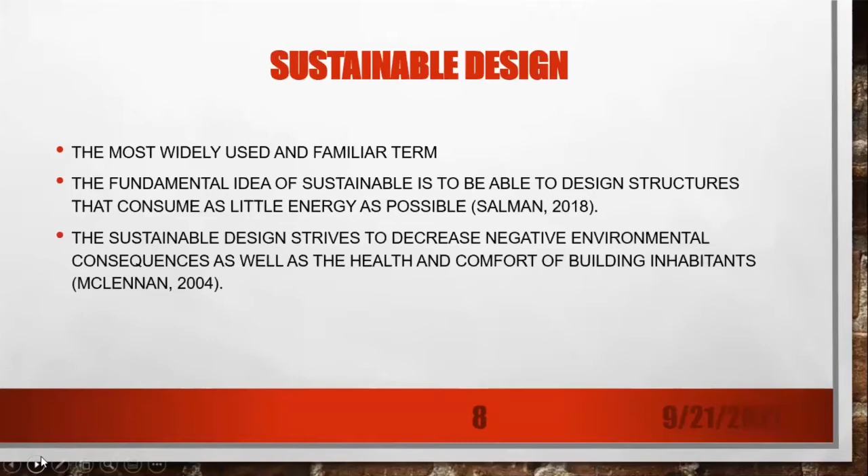Sustainable design is the most widely used and known term among today's environmentally friendly approaches. The basic idea of sustainability is to consume as little energy as possible. At the center of this approach, like the other approaches, is the human being.

Biophilic design: the main purpose of biophilic design is to create suitable spaces and eliminate the negative psychological consequences of the built environment on humans. This approach is entirely people-oriented, like the other approaches.

Human-centered design: the common feature of all these approaches is that they put humans at their center, as well as reducing damage to the environment. This is never a bad thing, but we are not alone in this world.

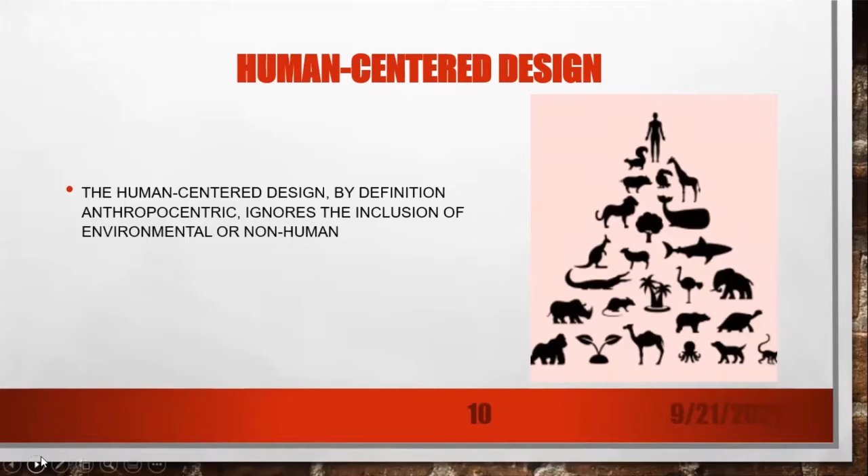How many designers consider coral reefs when designing? I am not sure, but maybe a few. Because rising global sea levels or species loss do not affect the success of our business and our buildings. Because we are designing for humans, not non-human creatures.

We know the problem, and we also know the solution. All approaches such as green, ecological, sustainable, biophilic, and so on refer to technical solutions that are essentially unsustainable systems. They may slow things down, but they cannot lead us to a genuinely healthy, green world. They can increase material and energy efficiency, but they cannot significantly reorganize development based on resources.

Now, it's time to talk about nature-centered design. Nature has the potential to renew itself unless humans intervene, as I mentioned earlier. When all human design, buildings and services, resource extraction, agriculture, and industrial processes are evaluated, an understanding that brings together processes by designing infrastructure that imitates and replaces how the natural world works, while putting all other living creatures at the center, must be developed.

Take an example. Before the construction, the location was forest, wilderness, agricultural land, and marsh, each with its own metabolic fluxes, which converted solar power, absorbed carbon dioxide, produced oxygen, and provided habitats to a multitude of tiny animals. The act of construction modifies all these cycles.

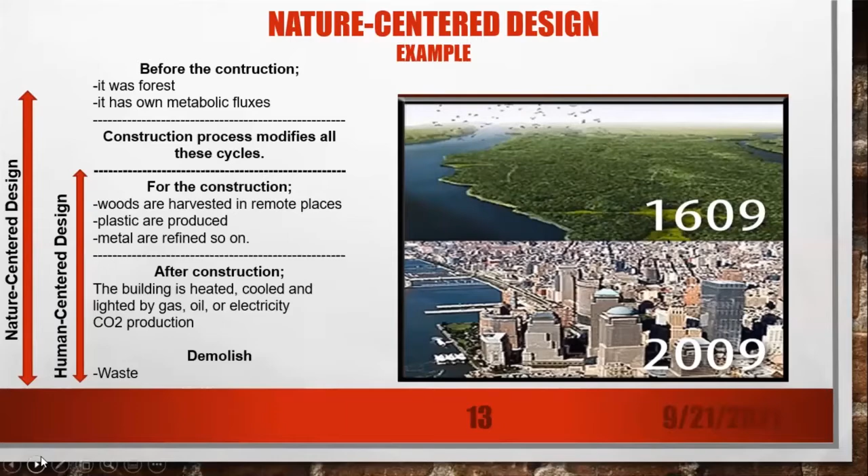To sum up, if we believe that humans are the only remarkable species on the planet, we will continue to harm nature without considering the processes described. The future of humanity is dependent on nature, moving away from a completely human-centered perspective of the world. Building with nature will be a critical tool in developing a crucial new architecture for empathetic design. Thank you for your attention.

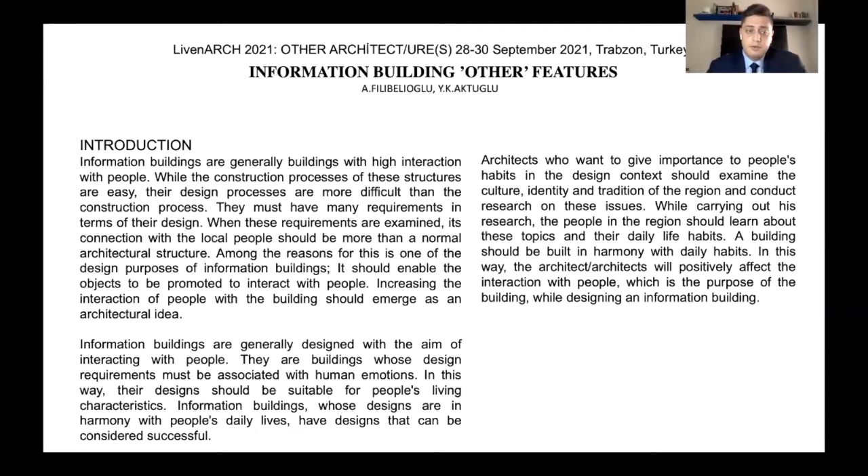For culture, since ancient civilization, meeting the shelter needs of people has been in line with the culture, identity, and tradition of the people. Every civilization has its own characteristics. One of the important titles for information buildings is the title of culture.

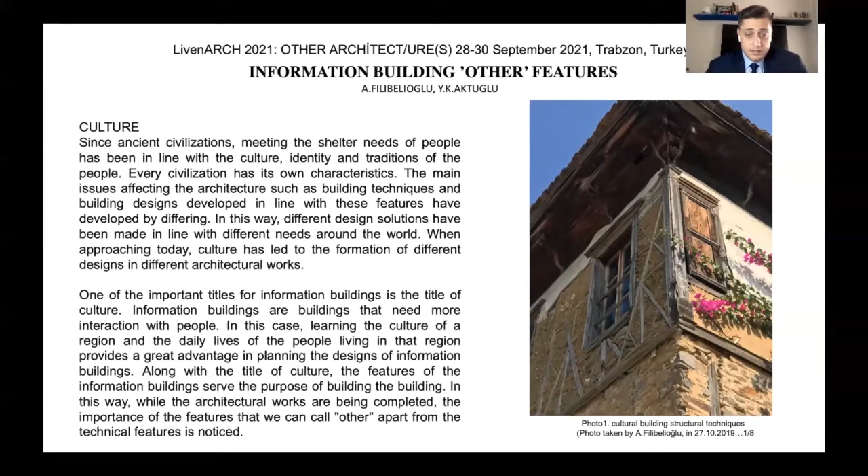Information buildings are buildings that need more interaction with the people. In this case, learning the culture of the region and the daily lives of the people living in that region provides a great advantage in planning the design of information buildings. In this way, while the architectural works are being completed, the importance of features other than the technical ones is noticed.

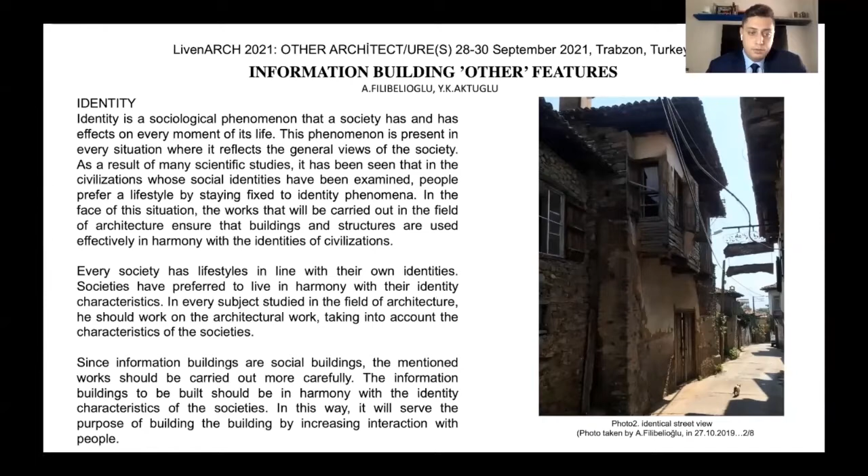Identity is a sociological phenomenon that a society has, and it has an effect on every moment of its life. Every society has a lifestyle with its own identity. Since information buildings are social buildings, the mentioned works should be carried out more carefully. The information buildings to be built should be in harmony with the identity characteristics of the society. In this way, it will serve the purpose of the building by increasing interaction with the people.

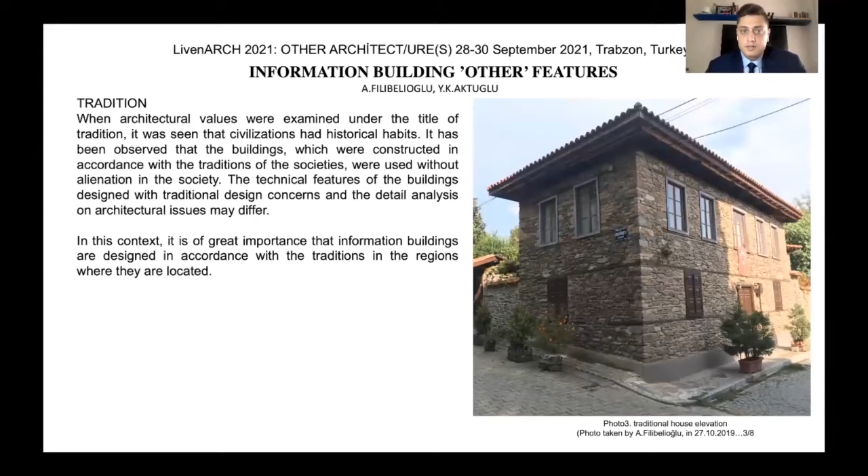When the architectural values were examined under the title of tradition, it was seen that the civilization had historical habits. For example, Infobox is an important information building.

The building was located in the city center of Berlin in 1995. After the fall of the Berlin Wall, the building was used as an information office, where the control of the redesign and construction of the city and region was carried out.

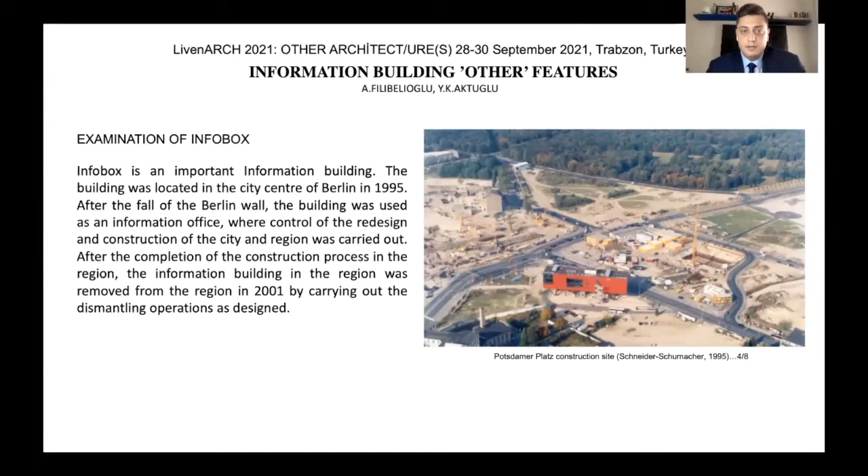For the architectural detail, there are technical details of the Infobox building. The building has 7 meters height from ground level, and each floor has 5 meters between them, making a total floor height of 15 meters. On the ground level, they use circular steel columns with concrete fill, with diameters of 40 centimeters. On the other parts of the building, they use I-beams. For the facade, they clad with steel panels, used at 2.5 meters by 0.5 meters.

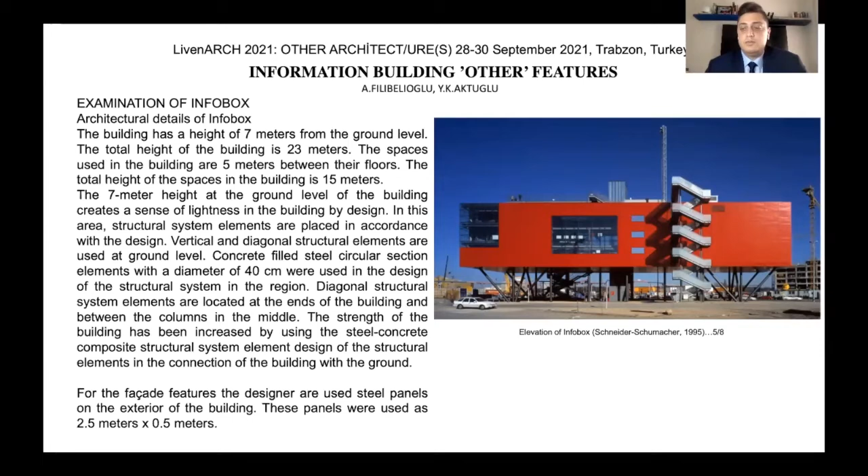For the culture, recreating the city center culture is to ensure that the people following the construction process are included in the culture.

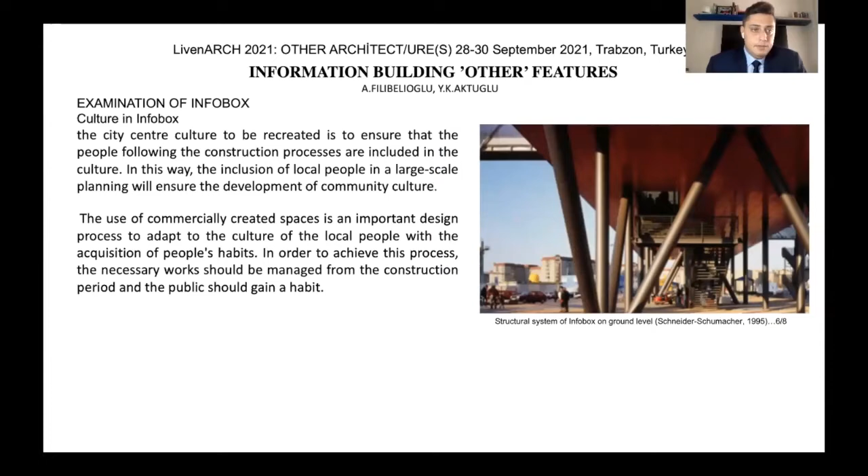In this way, inclusion of the local people in a large-scale planning will ensure the development of the community culture. The building was built with the aim of controlling construction site operation, and in addition, the local people were planning to gain habit of the region. When the Infobox information building is examined under the title of identity, it has the interaction between the city center created in the region and the local people, and has provided development of the social identity of the local people.

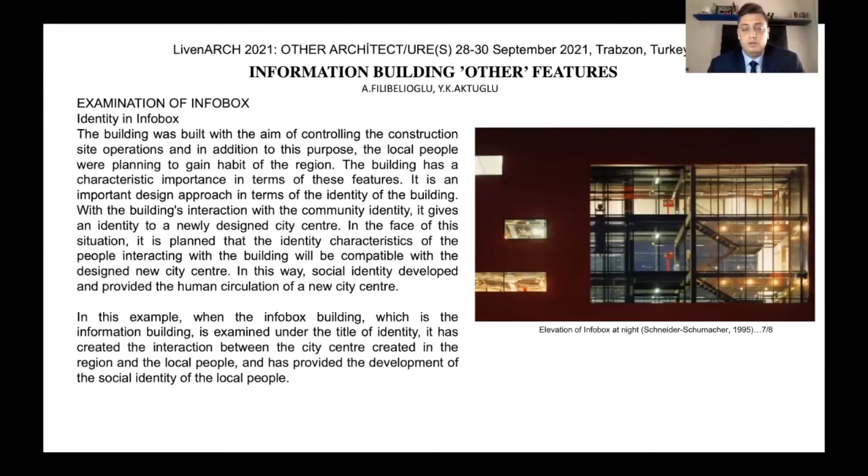The Infobox information building, examined under the theme of tradition, was examined as an element that provides formation in a new order. Examined in the face of the situation, the building design was built with the structural system in mind. After its construction, the building was dismantled and removed from its location.

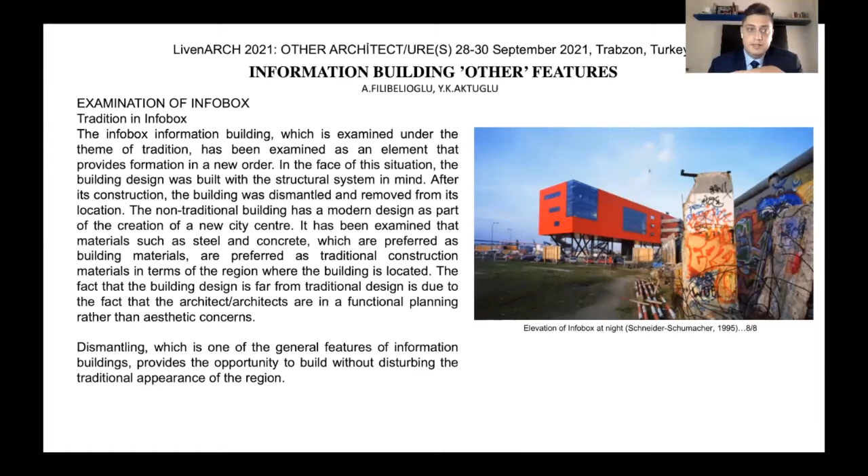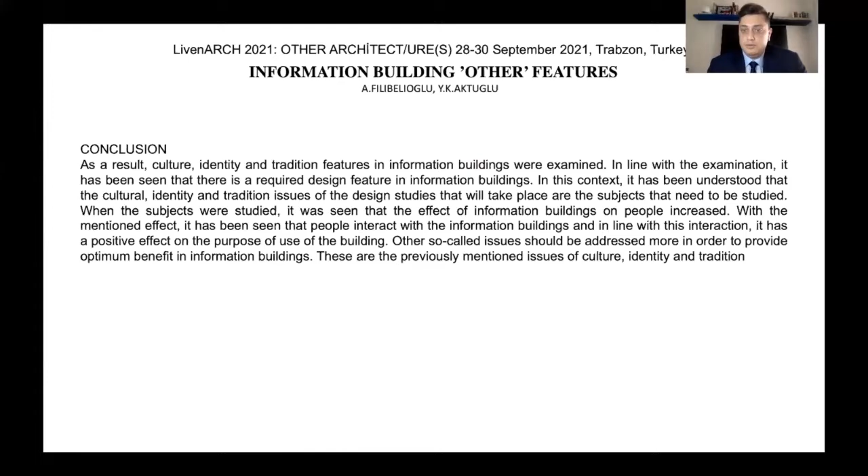As a result, culture, identity, and tradition features of the information buildings were examined. In line with the examination, it has been seen that there are required design features in the information buildings. With the mentioned effects, it has been seen that people interact with the information buildings, and in line with this interaction, it has a positive effect on the purpose of use of the building. Other issues should be addressed more in order to provide optimum benefit in information buildings. These are the previously mentioned issues: culture, identity, and tradition.

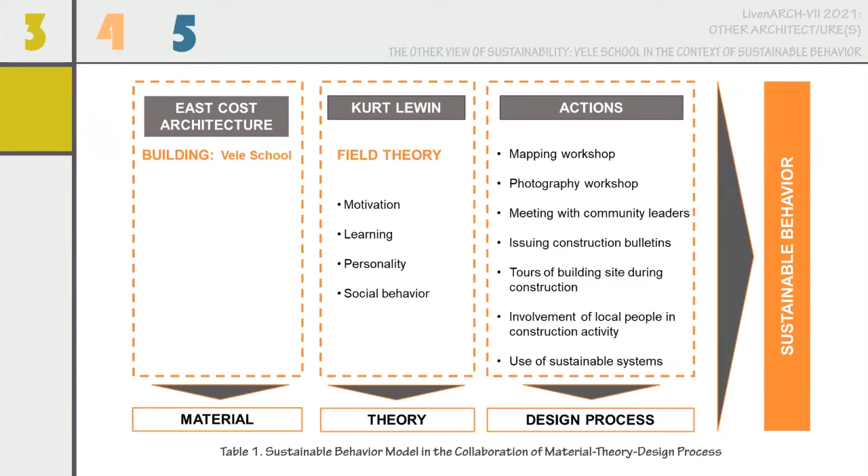When Vele School's design process is examined in the context of the concept of motivation, the map workshop, photography workshop, meeting with community leaders, issuing construction bulletins, site tour during construction, local people's involvement in construction activities, and the use of sustainable systems are matched to the concept of motivation. These actions are all actions that motivate the user and local people toward sustainable behavior.

In the map workshop, concepts related to the map of the area were introduced to students. The architects, who turned the map workshop into a fun activity, interacted with the students.

The actions increase the motivation of both students and architects. Lewin's theory views learning as a relational process in which a student develops new insights or changes old ones. According to the theory, learning is not a mechanical process that connects stimuli and responses within a biological organism. Field psychology explains the development of insight as a change in the cognitive structure of the living space.

When the design process of Vele School is examined in the context of the concept of learning, the map workshop, photography workshop, site tours during construction, and the local people's involvement in construction activity match the concept of learning. In the map workshop, architects learned about the physical, cultural, and social aspects of the place, whereas the students and local people learned by experiencing the building and construction process during site tours and by taking part in construction activities.

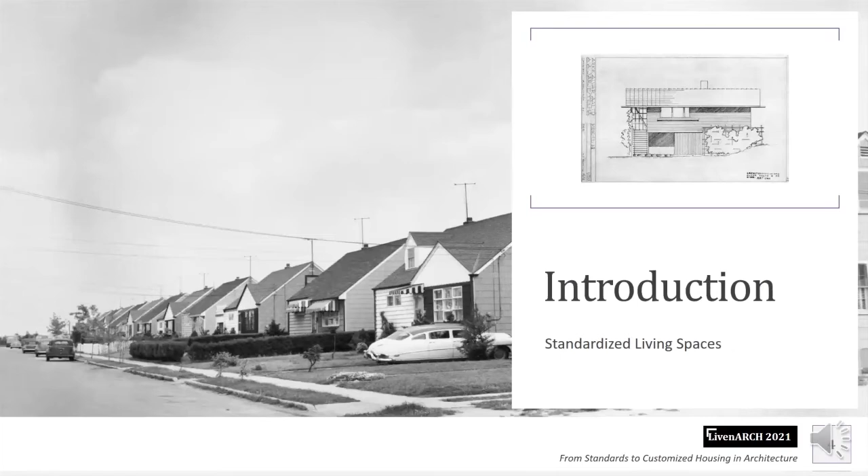Standardization of living spaces: the use of mass production techniques in construction started with closing the housing deficit in a short time and cheaply after the Second World War. These buildings, designed especially for workers and their families in industrial centers, attracted the attention of modernist architects over time. It was a dream of architects of the period to produce housing parts as Ford produces car parts on the mass production line.

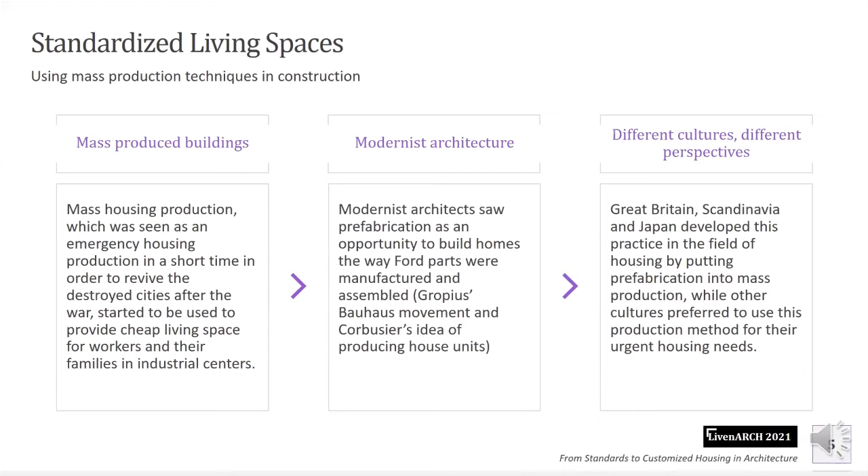Especially England, Scandinavian countries, and Japan have more specific studies compared to other cultures. The biggest driving force in mass production in England was the colonization movement, and England became a pioneer with the invention of corrugated iron, which can be considered the building block of prefabricated systems. In order to eliminate the post-war housing deficit, the government of the period started using factories for the production of housing parts.

The design of Scandinavian mass-produced residential pieces began in the mid-19th century and grew rapidly. The houses of Scandinavian countries, which paid most of their post-war debts with prefabricated housing parts, still consist of a considerable amount of mass-produced housing parts.

In Japan, in the same period, the mass production technique was tried to be used effectively in the metabolism movement, and the pioneers of the movement were supported by the government of the period. By supporting the social and cultural infrastructure of the Japanese people, the technology of the period was used efficiently, and mass production was interpreted differently from the West.

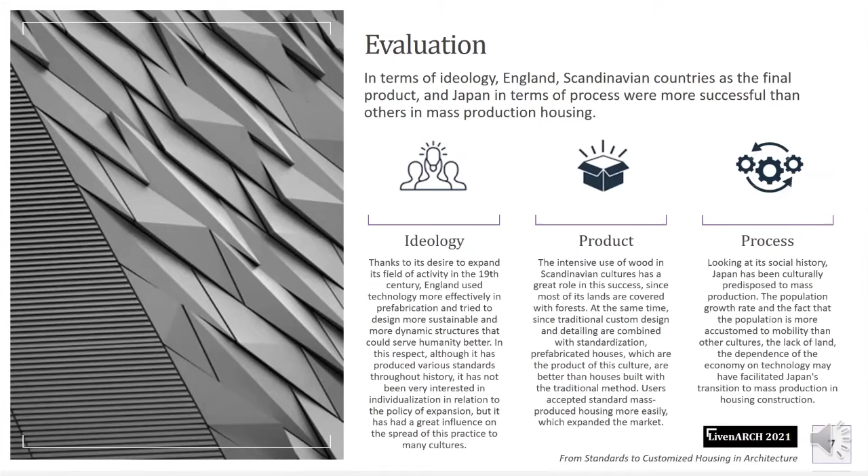Ideologically, England and Scandinavian countries lead in product, while Japan leads in process among mass production houses. England's expansionist principle pushed it to use technology more effectively and country-specific building materials, personalizing through detailing. Scandinavian countries developed the product itself, while Japan accelerated the process by efficiently evaluating the social history and resources of its people.

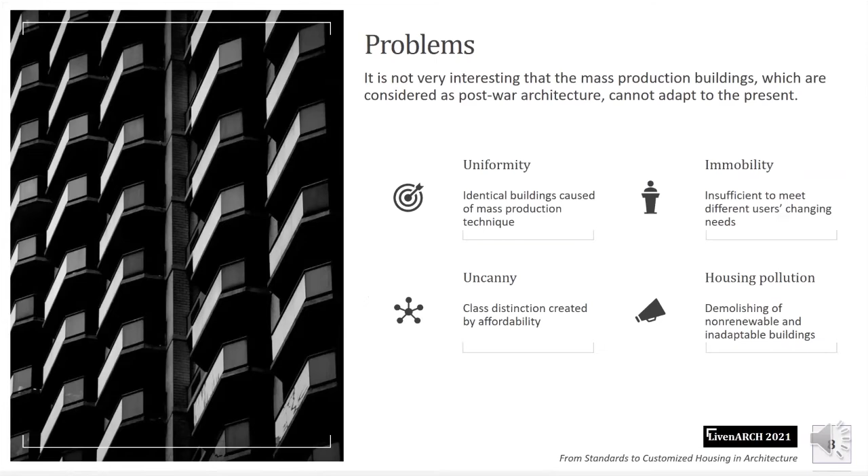Still, since mass production structures were designed considering post-war conditions, they could not adapt to the present day. The main problems include uniformity, inflexibility to develop, the uncanniness created by class difference, and housing pollution caused by the disuse and demolition of useless houses.

At this point, we need to look at customization. Throughout history, people have customized their living spaces according to themselves. The key to flexible space is changeability.

Changeable space definitions, space elements, and location, as well as changing users and their wishes and needs, should be considered. The need for shelter, a basic need, should be economical, sustainable, adaptable to its conditions, and personalized.

This will be possible by changing and adapting construction techniques. As a suggestion, we bring the concept of mass customization, which brings together mass production and customization, to be examined at the housing scale.

The most important point is that users determine the space they will live in, while designers, architects, and engineers take a supporting role, not that of the main creator. Three steps can be identified: identifying, designing, and combining.

First, the user's wants and needs should be identified. The design of life modules requires the active use of information technologies. The key is recognizing that living spaces and usage patterns can change as the user's lifestyle changes.

In the second step, information technologies play an active role, presenting multiple suggestions to the user simultaneously through rapid evaluation and probability calculation. Afterwards, it can be made suitable for the user as soon as possible using mass production techniques during the production phase.

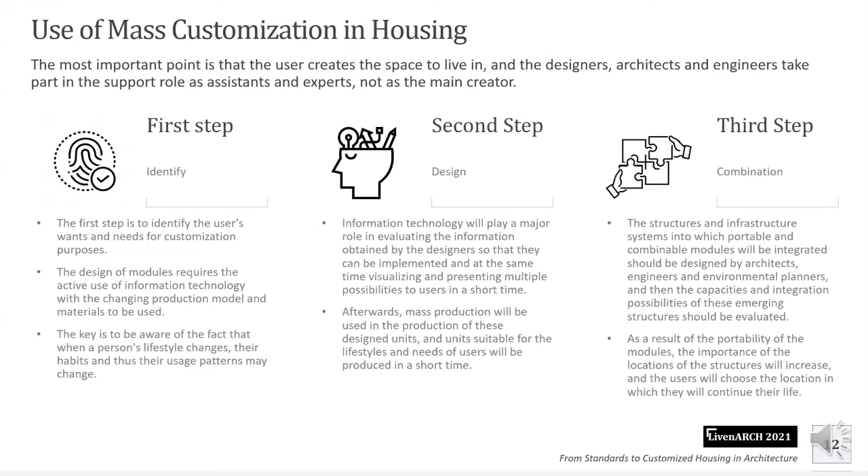Continuous and fixed structures should be designed at the centers of transportation networks so that living spaces can be connected in different ways and benefit from common infrastructure services.

In conclusion, it is necessary to develop housing, a consumer product, and turn it into a product that can meet user needs with less cost and a shorter production process.

To achieve this, it is necessary to overcome the traditional methods and building materials that lead architects to design living spaces rather than the elements that make up living spaces.

Afterwards, mass production, which is used in producing all kinds of products today, should be used more actively in housing production. The ways of using this technology together with customization should be investigated, so a new production system can be adapted to the present day, focused on the changing wishes and needs of the user.

Here are the sources used in the study.

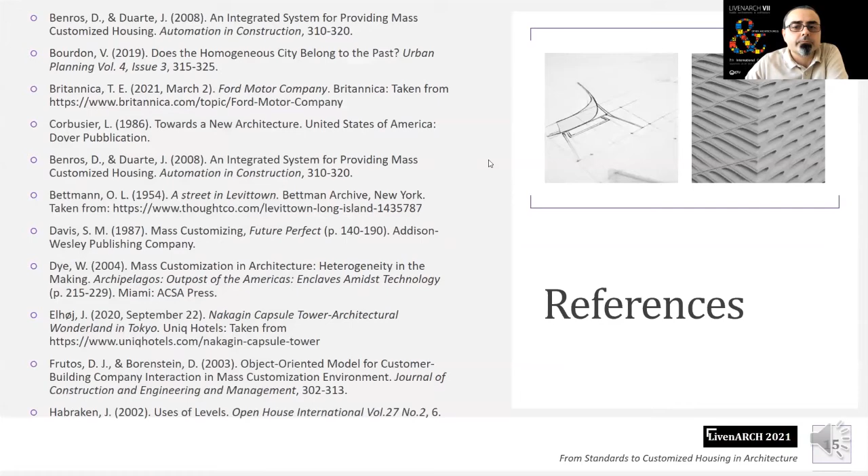Okay, thank you very much. It's a very nice presentation, with lots of questions on my mind.

But I have one more question, not related to your presentation, for the organization committee. As we all know, there's one more presentation, but the owners, Umut Boraşahin and Esin Kömez Dağlıoğlu, are not here. What does the committee think? Do we listen to the presentation or the recording here, or not? What is your advice to us?

Is there somebody over there? We leave this decision to you. Okay, let's listen because it's very exciting—they are examining the Arter building in Istanbul, with some engagements regarding its form, structure, and so on.

Oh, sorry, we don't have his video to share, so we can just skip it. Okay, so we are just skipping it. That's okay, so this is the end of the presentations.

We listened to four different presentations today for this session. The first one was from Şeyda Emekci, questioning nature-centered design with anthropocenic effects and issues, human-related design problems, and so on. Then we listened to Arda Filibelioğlu and Yeşim Kamile Aktuğlu.